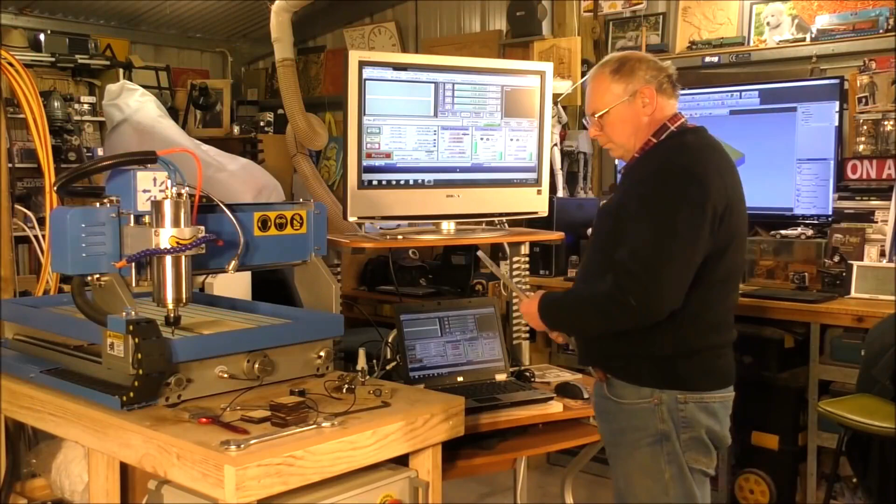Welcome to my workshop. Today we're going to cut the second part out for Katie, the little CNC lathe, and we're going to make it out of this piece of 12mm thick aluminium, and it's 100mm or 4 inches. The total part is only going to take up 70mm, and that's the bracket that is going to connect to the ball nut for the Z axis.

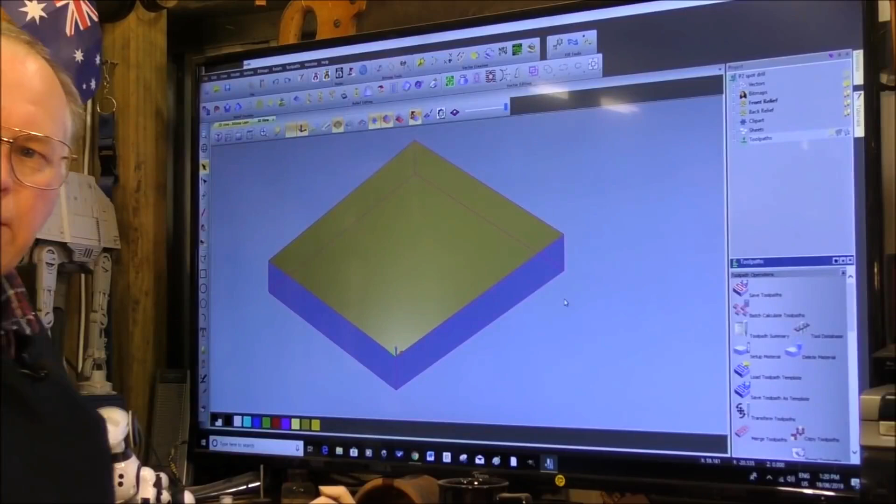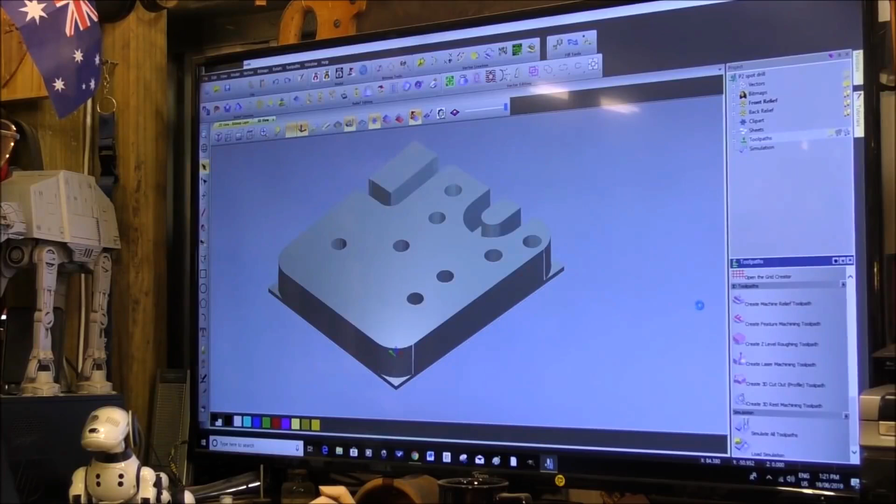I've drawn the part up in ArtCAM Jewelsmith over there, and I'll just show you. So this is the bare piece of aluminium, and I'll run the tool paths. It's quite a simple part, really. And there it is.

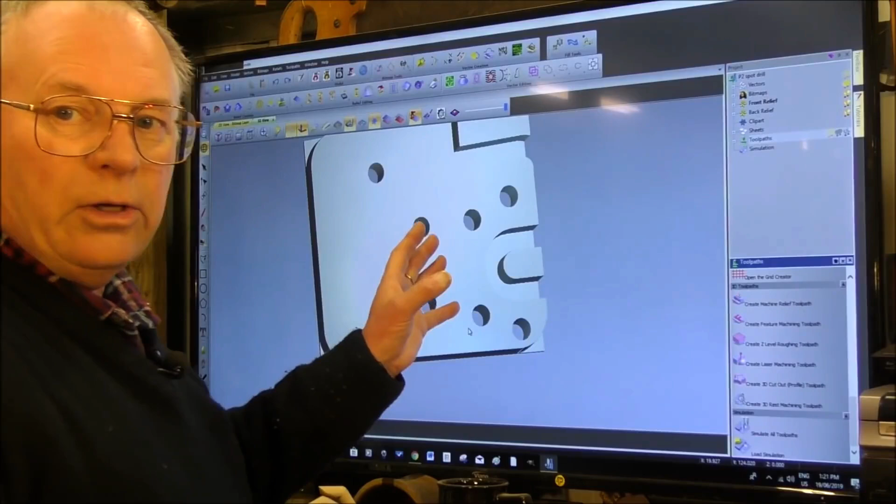In actual fact, I'm going to have to modify this, because originally when I first drew this up, I was going to use 10mm plate, but I found a small offcut of 12mm, so that means I need to rerun the tool paths, which is very simply done. This is ArtCAM Jewelsmith 2012, and I've had this one since 2012,

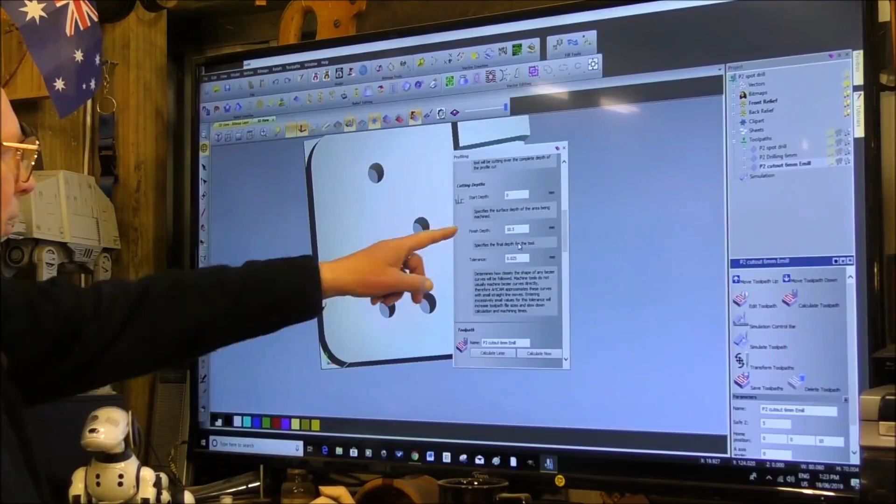Okay, so we're going to tool paths, spot drill in, cut out, and we'll edit this one. Let's see what I've done here. Finish depth 10.5, and that should have been 12.5. I like to go through to the other side. What I do is I put a piece of wood underneath, or hardboard or something, and I cut through to that, so I get a nice clear cut.

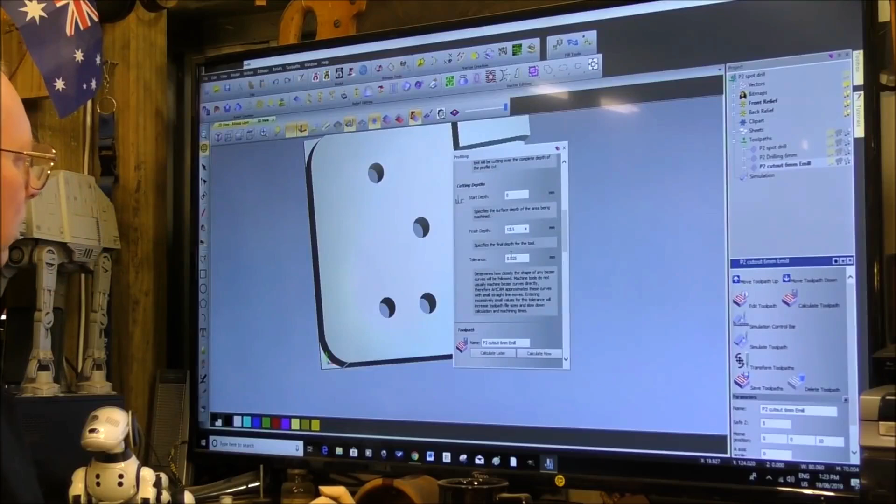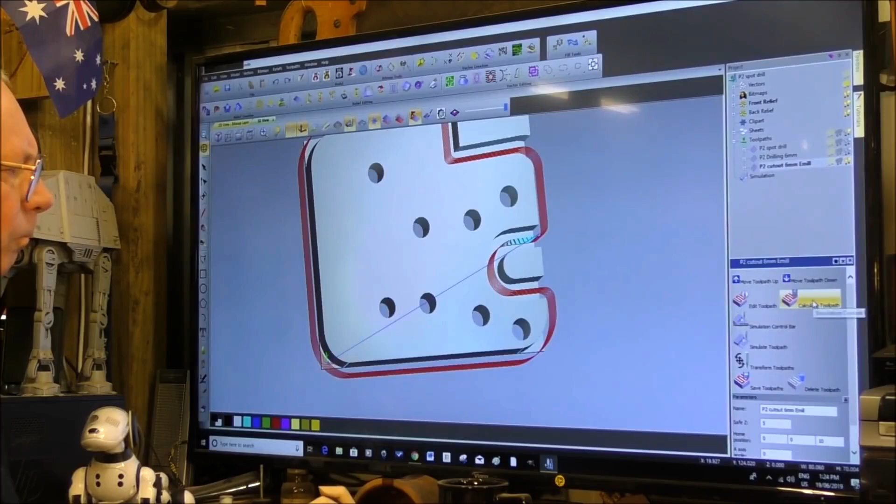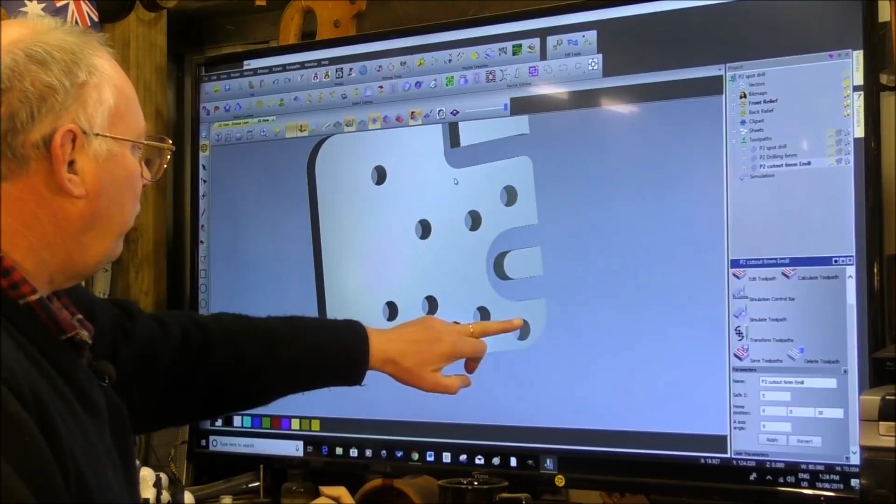So this is going to mount to the chassis block that I've made and mounted in the last video to the saddle of the lathe, and of course this bracket comes off the end of it, and this then gets bolted to the ball nut. These holes are strategically positioned because I have other drillings in through from the top, and obviously in through from this side as well of the main sort of chassis securing block.

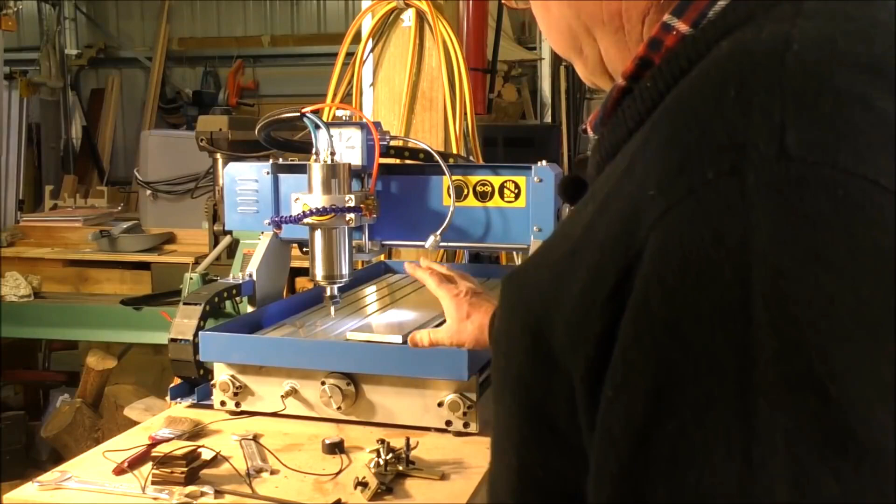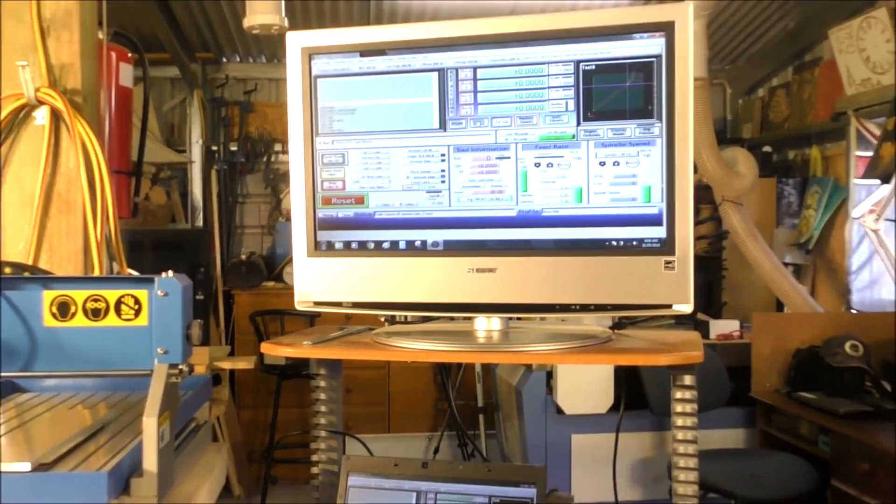So before we can start doing a job, you need to home your machine. Now it's very simply done in Mach3. Just press REF ALL. In Mach3 you'll see that it's referenced now X, Y and Z in the machine coordinates.

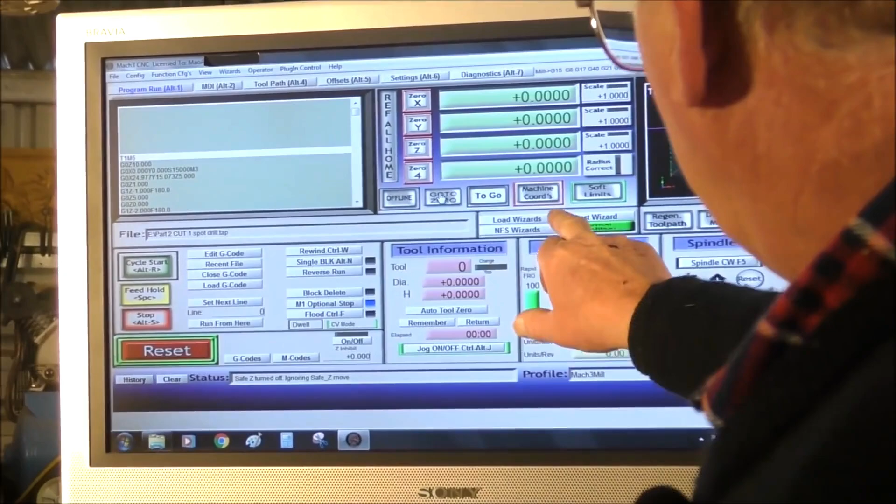Okay, so I've put my piece of material on the bed now, and I've lined it up nice and square. But the last job that I used this for, which was machining that brass medallion, of course I've had the spindle set low down in its holding, so now I've got to raise it back up. So the first job I've got to do now is to set the X and Y 0 on this corner here, and then we'll set the Z with the setting tool. So let's jog over to this corner.

And we get somewhere close. I've got plenty of material here. This is 100 millimeters wide, and we're only cutting an 80 millimeter piece, so I'll actually take it onto the material a bit. So we cover everything, and that's fine. So I'm going to set the X and Y 0 there, and you've all seen how I do that.

So now we'll raise it up and move it onto the material here somewhere, and we'll use the Z height tool setter. And that goes something like this. And we're ready to go. Okay, so here we go for the spot drill.

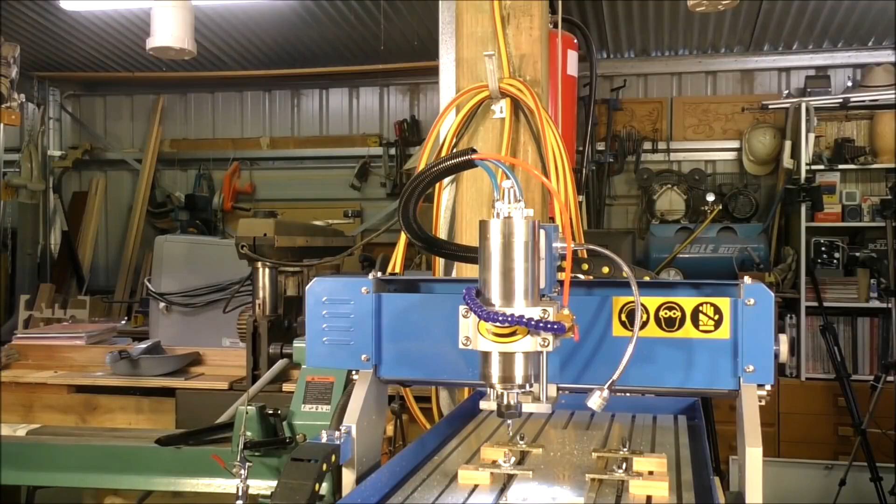And that is, let me just move it over to one side. I'm going to show you a couple of little tips now about altering the spindle in its mounting. And one of the simple things is you get an odd block of wood and you put it underneath the tool. Don't put your fingers under the tool, because sometimes they can be unpredictable, and this can slide down, and this weighs about 8 kilos or more, and it'll go straight through your finger.

So slacken these off. Okay. Now what I do is I put my hand underneath it there like that. Okay, so the chuck or the shaft is between those fingers. You just take the weight of it, get a screwdriver or something like that, just in here, and just wedge it open. A bit more.

Sometimes it can be a little stubborn. Might be a little bit too. That's fine, because I've got to take into consideration the retraction of this as well. So do it up at that, but notice, never get your fingers underneath it.

And this resulting mess is the only drawback of machining aluminium and certainly cutting parts out with a CNC router, because it's very fine small chips and it sprays it everywhere and it gets all over your machine. And I use WD-40 as a cutting agent. That's what you see me squirting on there. I also use air, because if you don't clean out the track when it's cutting it out, it'll just snap the tool off.

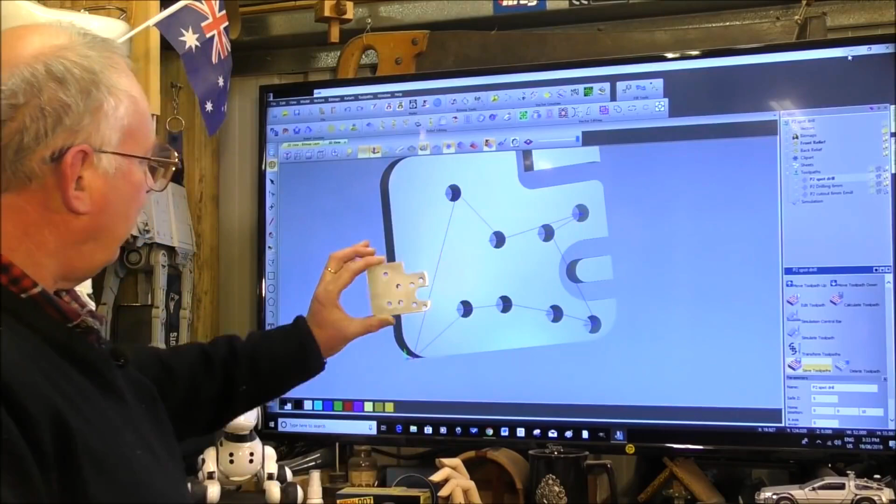And you'll also notice during the drilling process, I only had this running at 5,000 RPM, which is the lowest it'll actually cut, because you go lower than that and you don't have enough torque in the motor. These are high revving and the torque band is quite high, say from 10,000 up. And this is a 2.2 kilowatt spindle too. So do you think this looks anything like that? That's how to cut a piece of aluminium out.

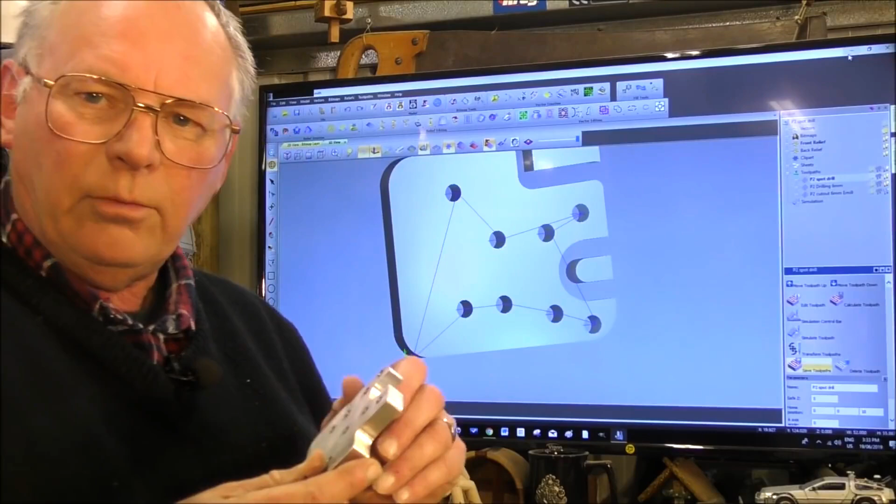And you know, this is as it comes off the machine. I have deburred the holes, but it's quite clean when it comes off. It's not bad at all, actually. I can just feel a little bit of an edge there, which I'll take off with a bit of paper, but pretty good. So I'll go and fit this on Katie now. There's no reason why it shouldn't fit.